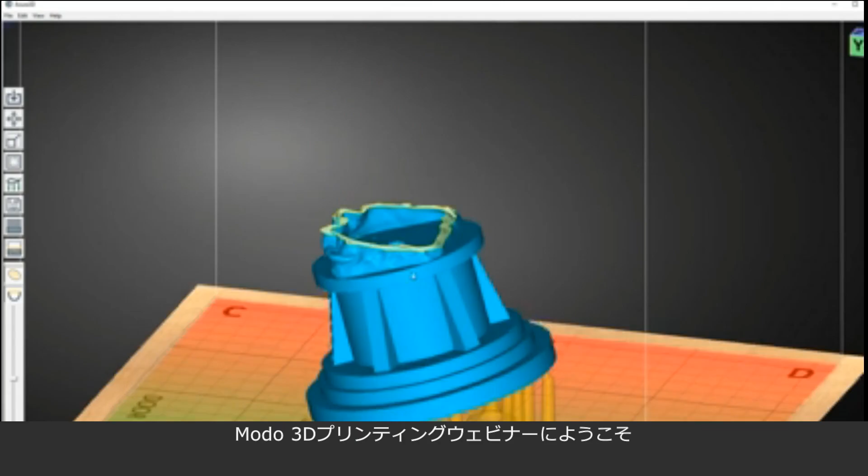We're back in Modo 13.1, and just like before where we used our dragon model as the example for FDM 3D printing, I've imported our gargoyle model, which will be our second example for SLA 3D printing. I've taken a few steps forward on this: I ran mesh cleanup on this model, detriangulated the polygons on the base, and run a couple of Boolean ops to merge our supports and the gargoyle into the base itself. So now it's officially one solid piece and good for print on either an FDM or SLA 3D printer.

But now what I really want to talk about and focus on for this section of the video is how we can approach making this model hollow, in order to make the most out of our resin in our vat, so we're not wasting a lot of resin.

One way to do that is determining the scale of the model and how big it is that we want to print. If we take a look at the model here as is, and come over to our dimensions tool with our model selected in item mode, we can see it's just shy of 1.5 inches tall. That's great for game boards and various things we may be using this for, but maybe we want this to be larger.

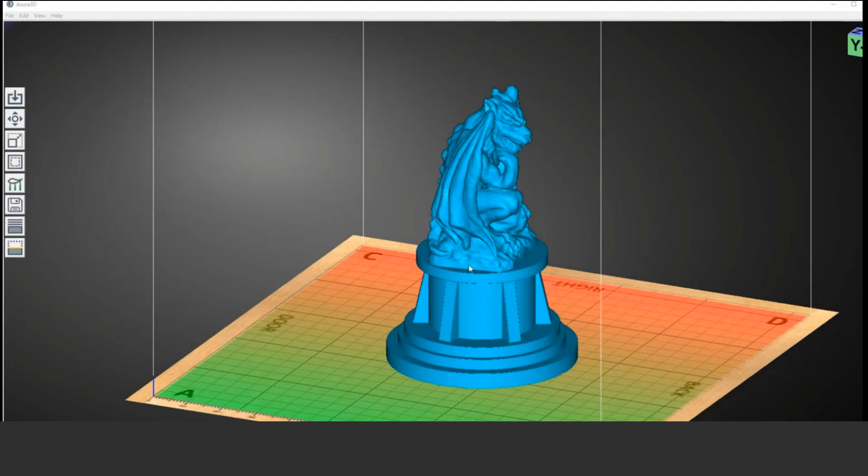So I've brought our model into Asura, and Asura is just one of many resin 3D printing applications available. This particular version came with the resin 3D printer that I own. Just like that software, if I click on one of these little buttons over here, I can drag through and have a visual look at what's happening with our model.

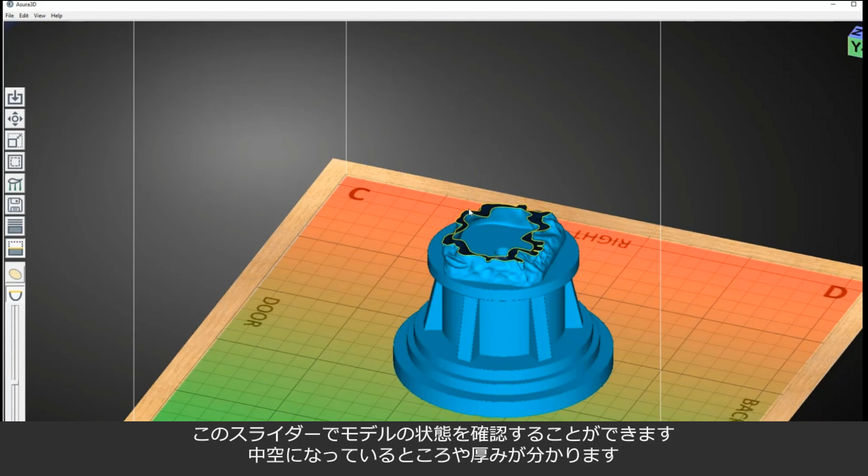We can see that it's hollow, and we can see that we have our 1mm wall thickness. There are a few little areas, like right in through here, and maybe this through here a little bit, that could potentially be problem areas when it goes to print. More than likely, it probably wouldn't cause any issues. This here might definitely cause an issue. So this is the kind of thing that you want to look out for.

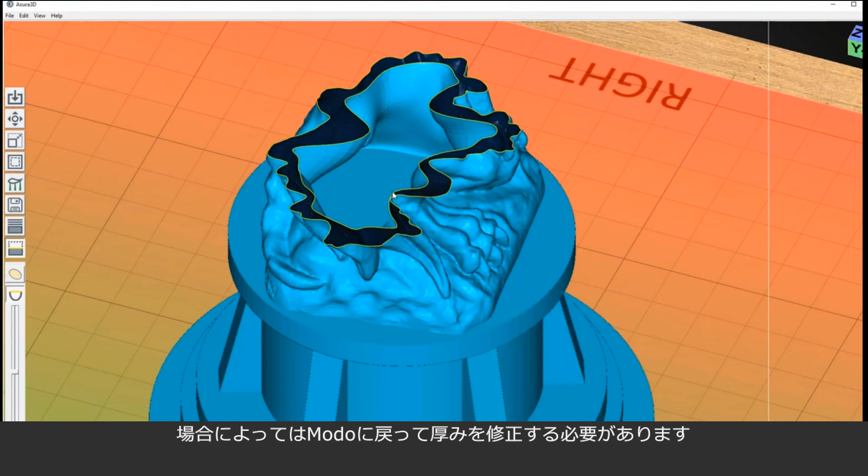Sometimes you just have to go back and tweak some of this and get it out to where you have a little more thickness in the wall layer there. One thing that we can do inside of this software, and is a fairly common practice for resin 3D printing, is we can rotate our model. Not always do you want to have your model parallel to the build plate itself.

More often than not, if you do any type of Google search, you'll actually see that the majority of resin 3D prints are at an angle of some sort. It might be 15, it could be 30, 45 degree angle, and so on.

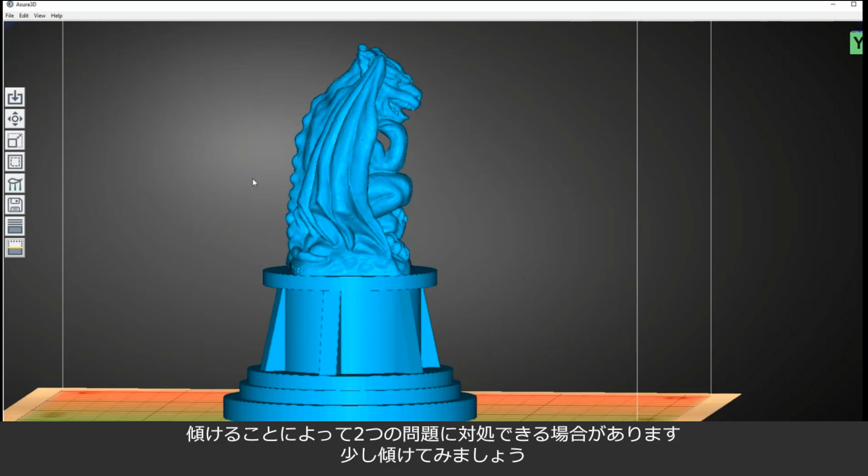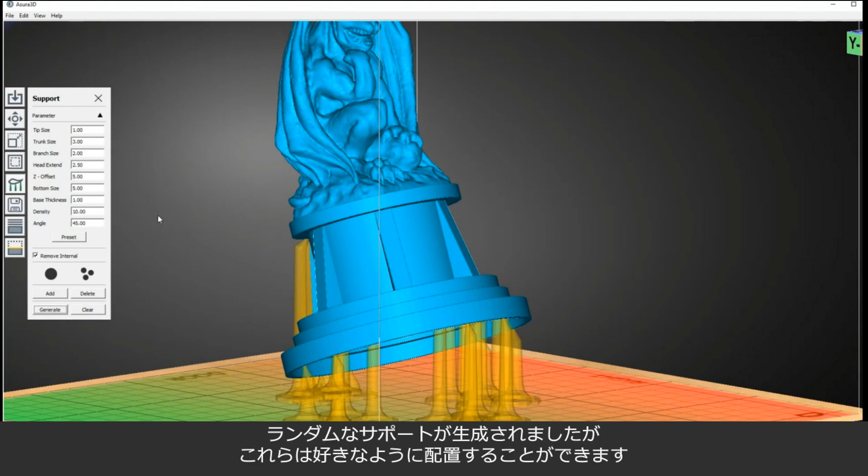This could serve two purposes for us with our model here. If I just go ahead and take this and rotate it to something like that, and hit center. Just for display reasons, that should be fine. I'm just going to generate some random supports, and these supports can be placed however I want them to be. When you have your own 3D printer and your own software, you'll learn that you can do similar things, and you'll want to think about strategically placing your supports for print.

However, the main point of this was to talk about this being at an angle. What happens is as our laser hits the resin and cures our layers one layer at a time, this does slightly raise above the resin itself, allowing a little bit of air and making use of our drainage holes for any resin that's inside here to drain out properly.

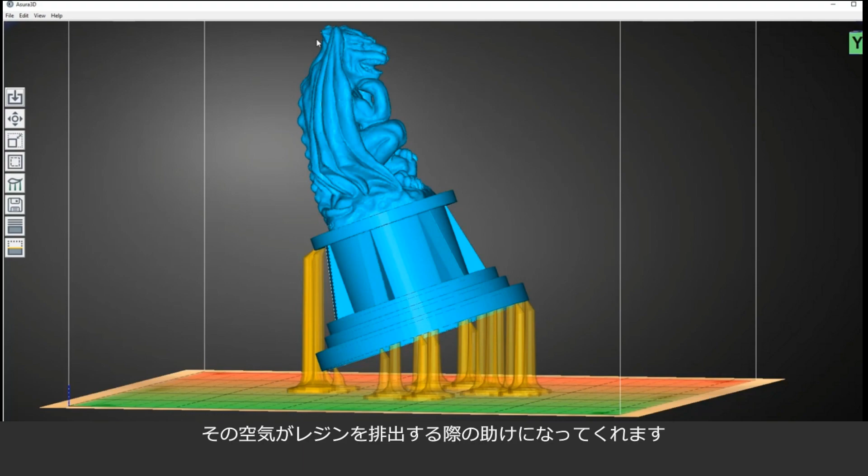That's one reason. The other reason is that at an angle, a lot of times those little thin areas aren't as big of an issue as they would be parallel to the build plate. Now that's not always the case, and that's not always to say that's the best way to go. Like this is just a little bit too thin for my liking.

So for me, as I would go back into Modo, I would grab these few little polygons and just pull it out 250 microns or something, just so that I know for a fact there's a significant amount of wall space here.

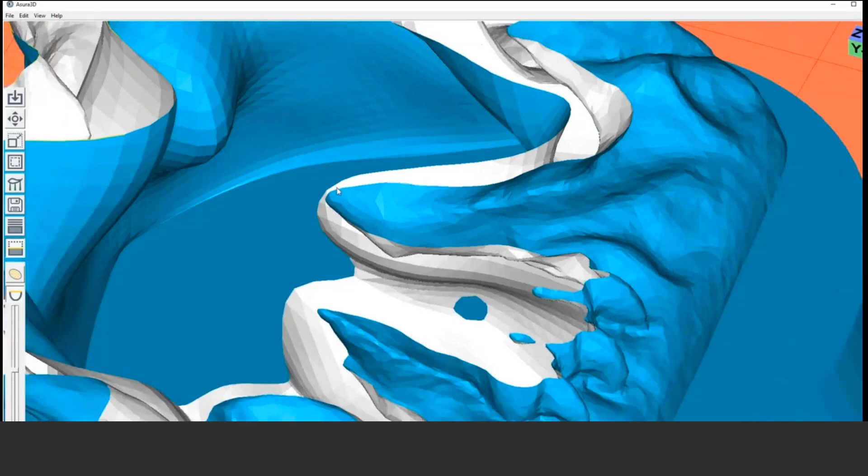So I've come back over here to Modo, and I've imported our gargoyle model that we were just looking at in Asura. Before we go, I wanted to share the last bit of information for you that I thought you might find useful, and that's creating printer volumes inside of Modo. It's really, really simple, and they can come in real handy if you're working on a model and you're not sure if it's going to fit inside of your printer volume.

Depending on the 3D printer that you're looking at, printer volume is important for the type of application you intend on using it for. So if you're primarily focused on making jewelry or game pieces, then you might want a fairly small printer volume. Likewise, if you're working on film props or something like that, like I tend to do, then you might want a medium to larger size. That's purely up to you.

However, either way, inside of Modo, having your printer volume can be really useful to make sure that whatever model you're working on, whether it's your own or one that you've imported, will fit inside that volume and print properly. For my resin printer, I've got one here from my Moai printer, which is my resin 3D printer. It creates a simple box at origin and on the ground plane. If I activate my Dimensions tool again, we see that I have a printer volume of 180 millimeters in the Y by 130 and 130 millimeters square.